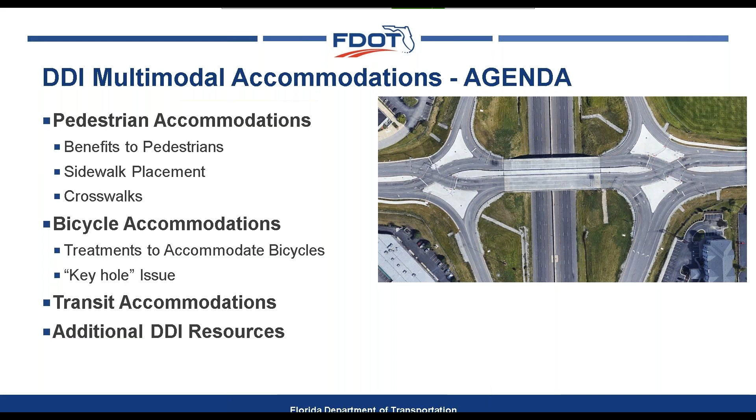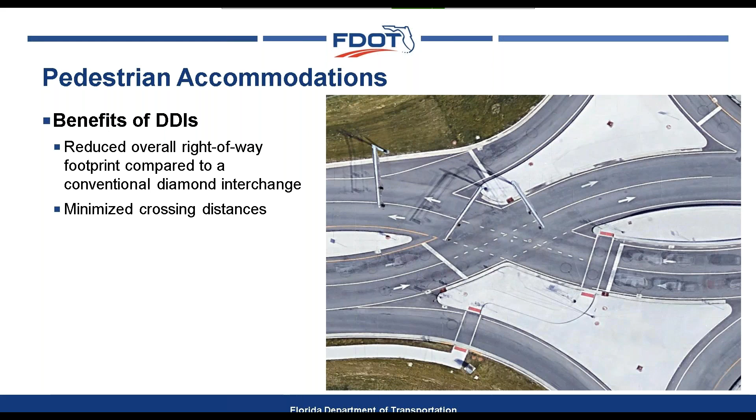DDIs offer several benefits to pedestrians. First, because of efficient traffic operations, we generally see a reduced footprint for a DDI compared to a traditional diamond interchange. For pedestrians, this means they're crossing fewer lanes to execute their maneuver. The intersections operate using two-phase signals, reducing pedestrian wait time and providing more green time. Similar to roundabouts, pedestrians are only tasked with crossing a single direction at a time, with pedestrian refuges built into the design, either in the infields or median, allowing for a simpler crossing. DDIs also provide opportunities for separate paths for bicycles through the interchange, providing separation from pedestrians and safer passage.

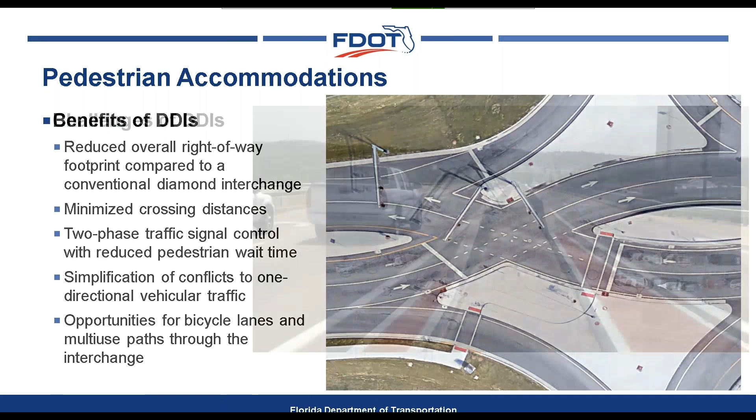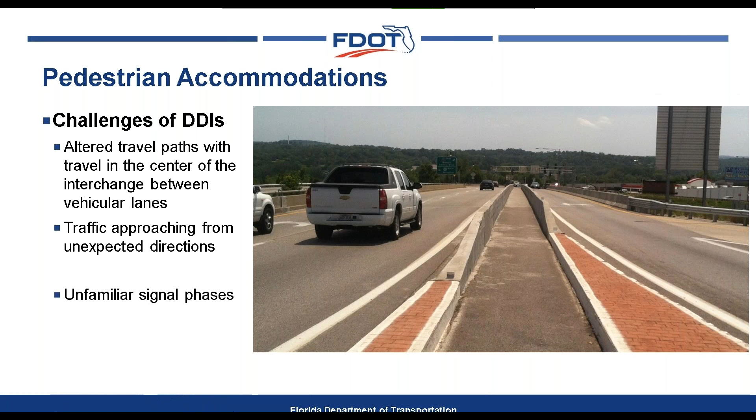DDIs do offer some challenges that may need to be addressed. First, one option allows pedestrians to be placed in the middle of the interchange, as shown in this figure. Placing pedestrians down the center is against user expectation and needs to be intuitive and give adequate protection for pedestrians. There are situations where pedestrians would have to look to the right for approaching traffic when starting their crossing maneuver, which is different than a traditional diamond interchange. The grouping of allowable vehicle movements in the DDI, such as the eastbound through on the arterial at the same time as a southbound to westbound right turn from the ramp, may not be intuitive to pedestrians.

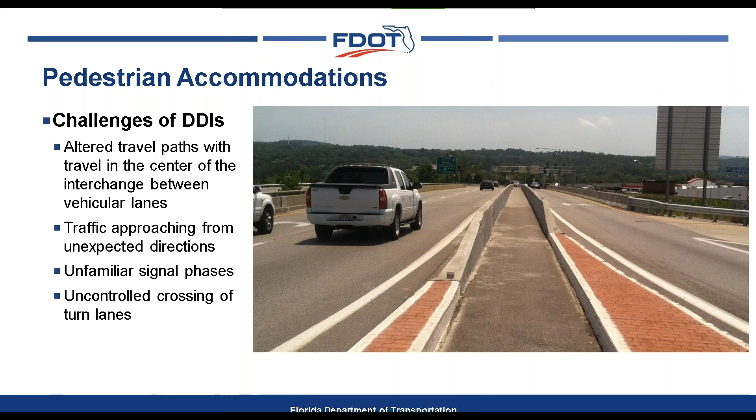Finally, DDIs can introduce situations where pedestrians must cross free-flow ramp movements. These challenges are certainly not insurmountable, but do require some additional care during design to avoid introducing safety concerns for all users.

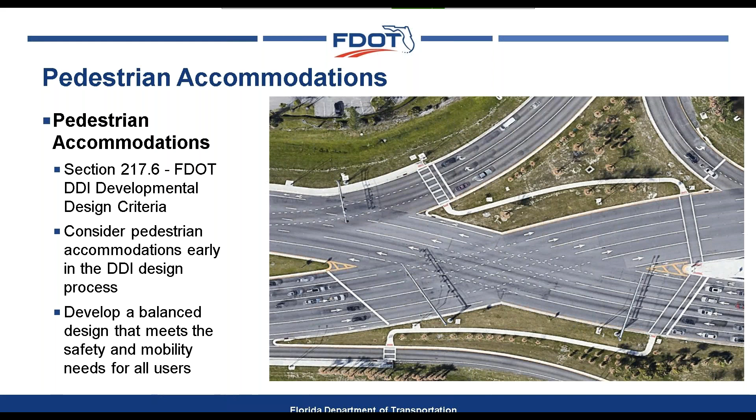FDOT provides guidance on pedestrian and bicycle accommodations in a DDI in their DDI Developmental Design Criteria. Pedestrian guidance is found in section 217.6. One thing to remember is to consider pedestrians early in the DDI design process, as the placement can affect the ultimate layout of the DDI. This will allow you to develop a balanced design that meets the safety and mobility needs for all users.

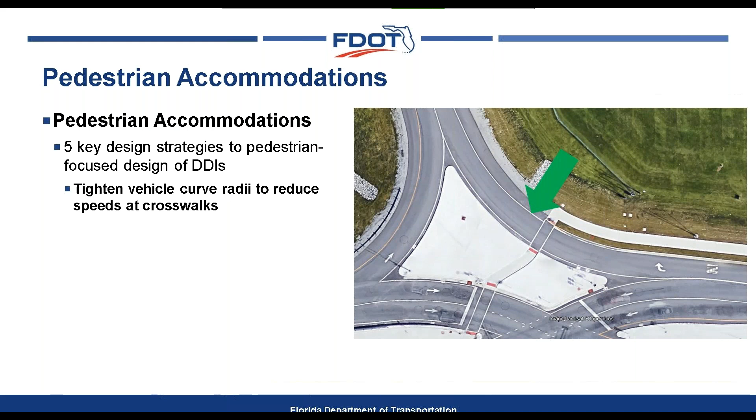When designing a DDI that includes pedestrian accommodations, there are 5 key design strategies to think about. The first is to look to reduce the vehicular speeds in the vicinity of the crosswalks. One way to do this is to reduce the radius of the turning movements. Research has shown that pedestrians have a higher chance of survival if hit by a car when vehicular speeds are reduced.

Second is to ensure that adequate sight distance is available for both pedestrians and vehicles at the crosswalks. The need is to make sure that both can see each other before the pedestrian steps into the roadway to initiate the crossing maneuver, and I think that's the critical piece. A lot of times we focus on whether the vehicle can see the pedestrian, but we also need to make sure that the pedestrian can see the vehicles approaching.

Third, try to provide storage length sufficient to store the vehicles at the yield location to avoid backing up into the crosswalk, as you see here. We don't want pedestrians to try to cross a ramp around stopped vehicles.

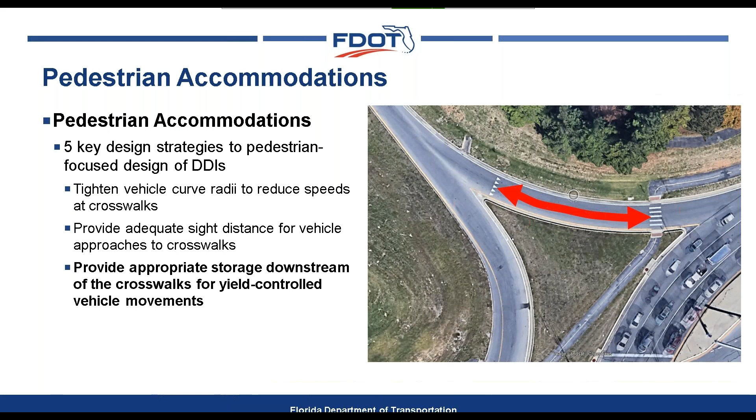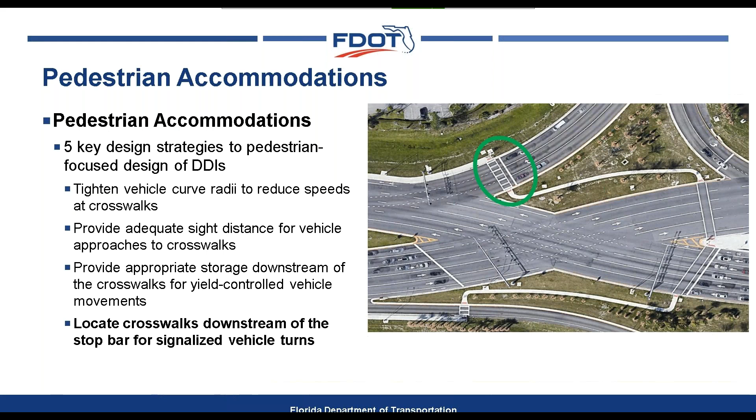Fourth, provide adequate spacing from the stop bar for the crosswalk. It's also important to locate the stop bar where drivers are actually expected to stop. This becomes hard at times as drivers try to creep up to look for gaps in approaching traffic.

Fifth, it's important to provide the appropriate traffic control at the ramp terminal. Different situations exist where the right turn, for example, could be a free flow movement, stop controlled, signalized, allowing right turn on red, etc. Understanding how these conditions impact pedestrian safety at your specific location is critical to the design.

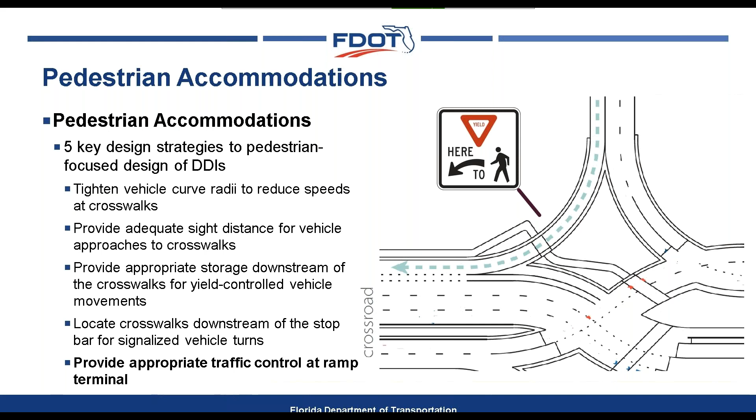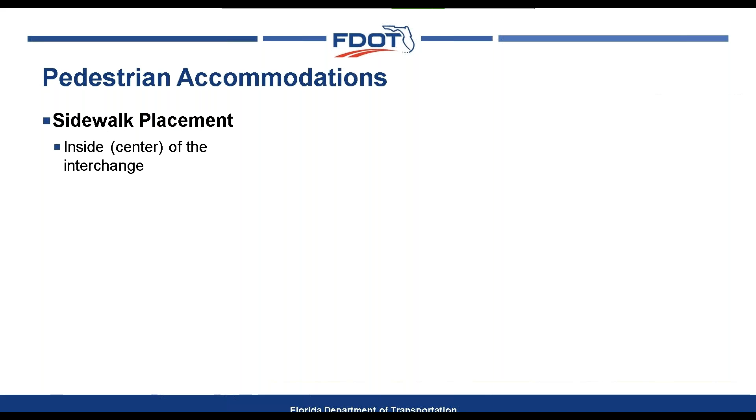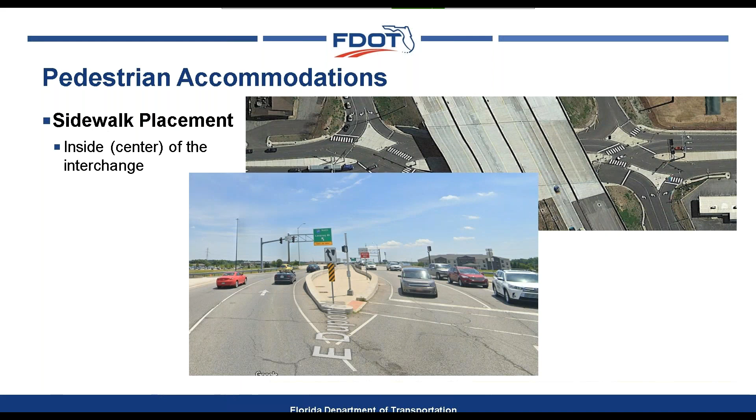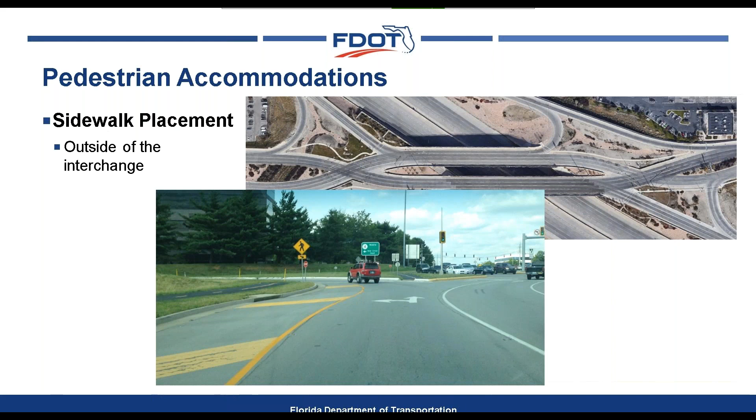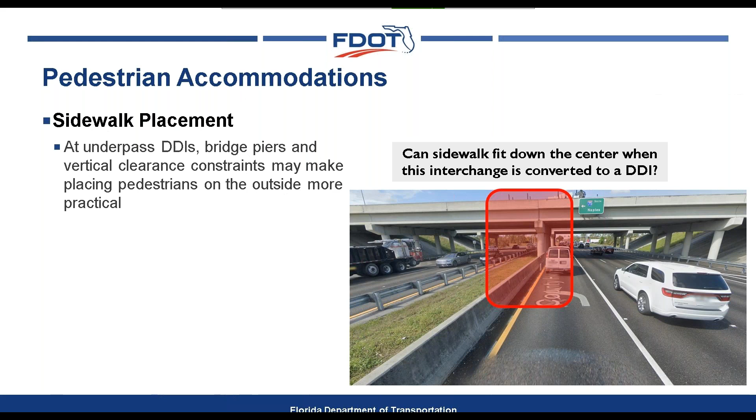If the number of lanes were able to be reduced in one or both directions, possibly, and that's something that would need to be confirmed early in the design process. Placing pedestrians down the center of the interchange minimizes conflicts with left turning vehicles by reducing the number of free flow ramps needed to be crossed.

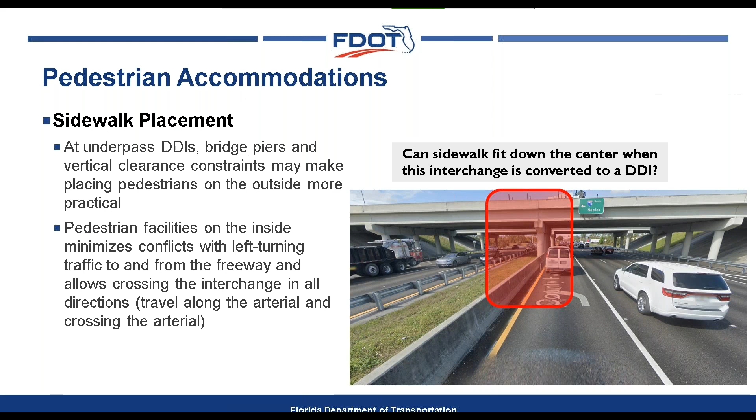As outlined in the FDOT DDI Developmental Design Criteria, section 217.6.1, the center, or down the middle, walkway is the preferred option for a DDI in Florida for several reasons. First, walkways down the center avoid free flow left turning movements.

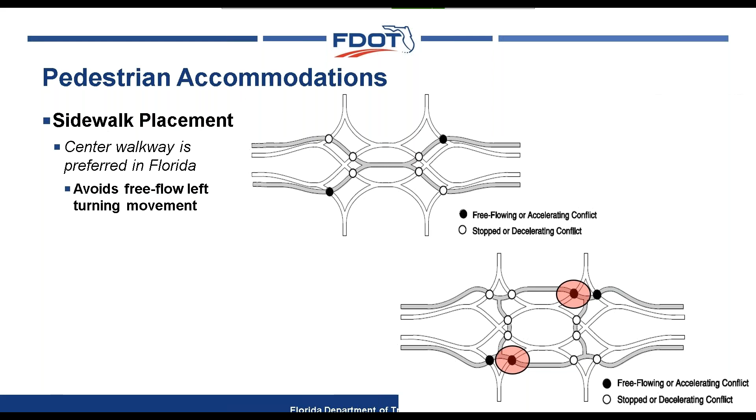Second, center walkways improve the line of sight between the pedestrians and the drivers. As the pedestrian approaches the crosswalk and looks to cross the roadway, there should be no obstructions between the approaching vehicles and the pedestrians. This allows the pedestrians to be fully visible as they cross the street, then continue the remainder of their crossing maneuver to get to the outside of the roadway, outside the interchange.

Finally, the center walkway is preferred in Florida when crossing from the median. Crossing at the signalized intersection is consistent with expectations, i.e. the pedestrians would look to their left first for approaching vehicles. So think about a normal intersection as a pedestrian steps out into the road, their first direction they're looking for oncoming traffic is to their left. And when they're in the median, it's the same thing.

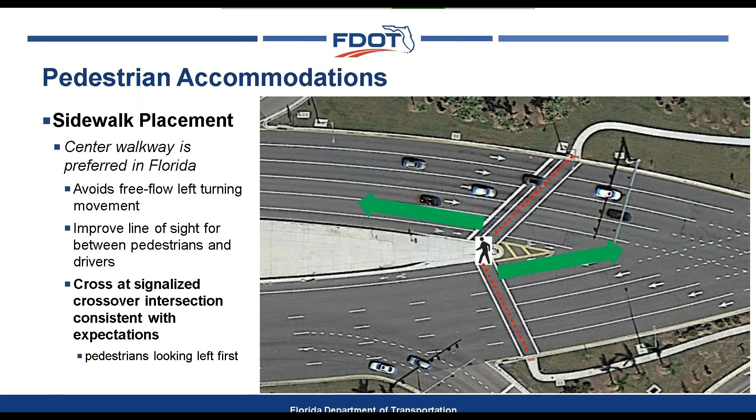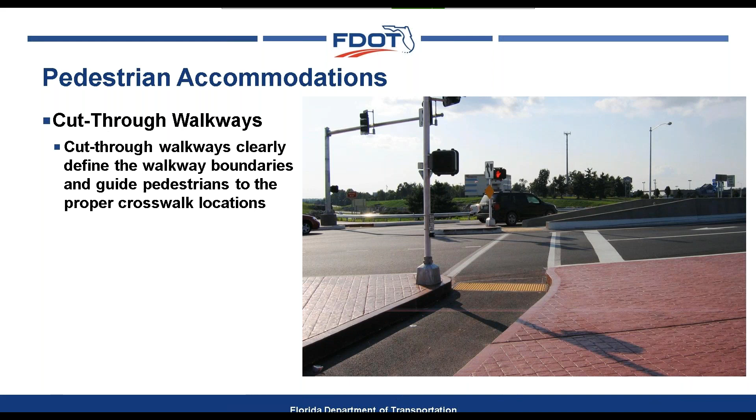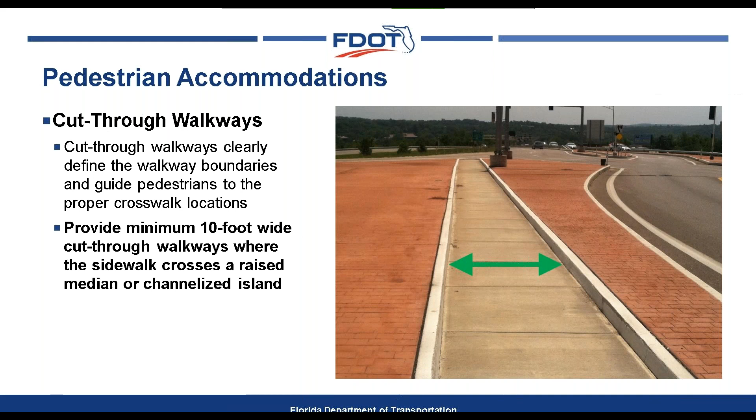The FDOT DDI developmental design criteria defines the cut-through walkways need to be a minimum of 10 feet wide when there is an elevation difference between it and the channelized island. And the walkway should be aligned to provide a perpendicular crossing at the next crosswalk to reduce the crossing distance and the pedestrian exposure.

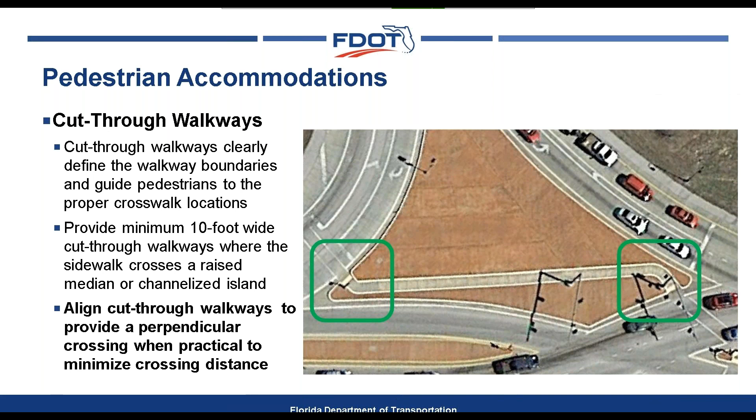When selecting the location of the crosswalks, several things need to be considered. First, drivers should be able to see the entire crossing, including the curb ramps, where pedestrians can be waiting to cross. Also, the pedestrians should be able to see the approaching vehicles. This is especially important at the free-flow crossings.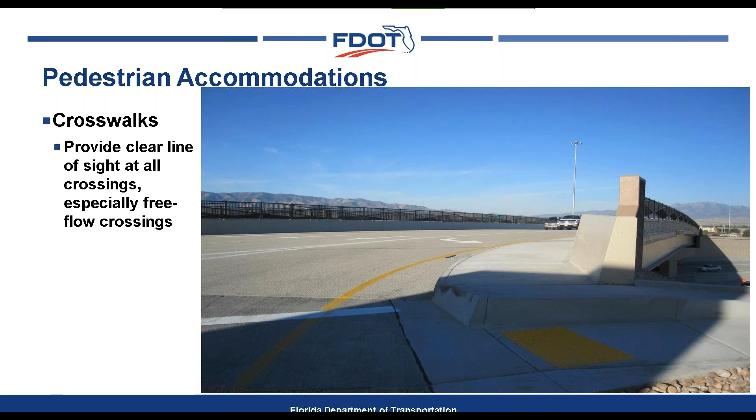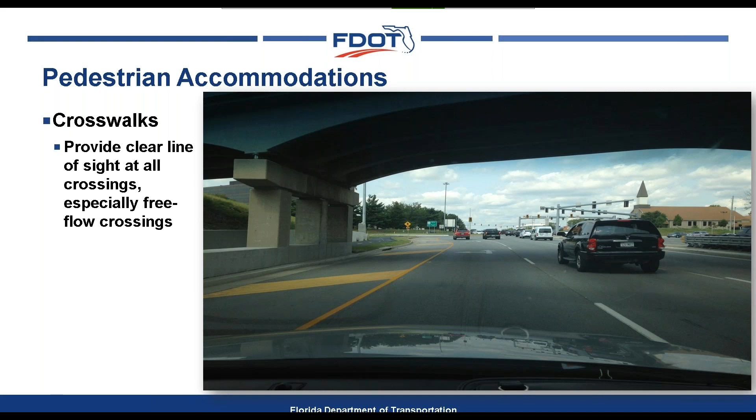For a DDI under the freeway, make sure the bridge isn't in the way. There are two important objects we want the driver to see as they come up to the pedestrian crossing. The first is a crossing with the appropriate signage as indicated by the left-hand line. Second is the pedestrian who would be located where this second line is pointed, or the right-hand line. Be aware of possible sight obstructions from any structure elements such as the bridge pier in this image.

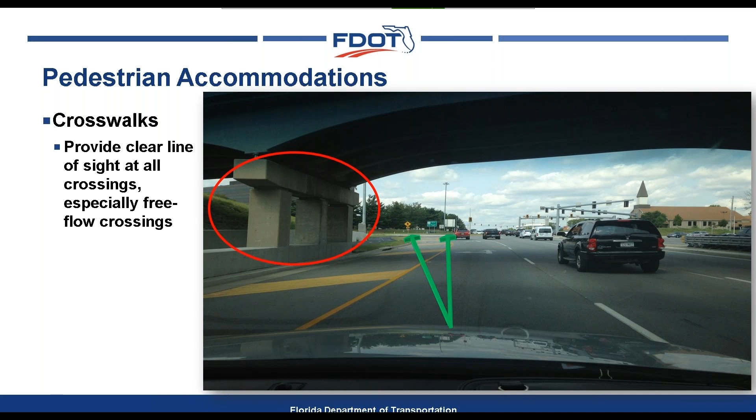As we've already discussed, avoid placing items that could block the sight line between the pedestrians and the drivers, such as a raised vertical barrier that helps define the eyebrow. For this DDI, the barrier is outside the sight line. If it would have been in it, one option would be to taper the barrier down or use a reduced height vertical face, such as a standard curb that can easily be seen over.

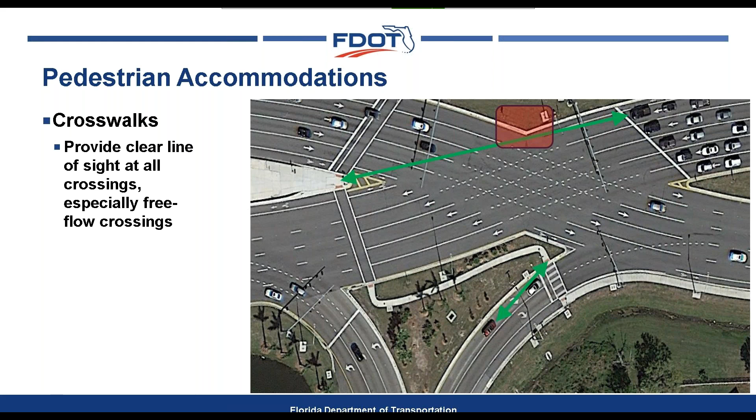Wherever possible, try to make the crosswalks as near perpendicular crossings as possible to reduce the crossing distance and the exposure of the pedestrian. Use judgment and understand the balance of the stop bar location, the clearance interval needed for the signal, and the crossing length. Also recognize the driver's tendencies.

In the case of this crossing, making this a perpendicular crosswalk would have pushed the stop bar pretty far away from the arterial for the right-hand turn lane. Would drivers really stop that far back, or would they creep up to see the approaching traffic and possibly be sitting in the middle of the crosswalk?

Position the crosswalks in locations where the expected speeds are reduced. When crossing the outside ramps, placing them close to the arterial as the vehicles are entering the curve is good for speed management, as well as positions them in the area where the drivers are really looking.

Pushing these crosswalks farther down the ramps gives drivers the ability to exit the curve and accelerate, as well as puts the crosswalk in a location where they're potentially looking over their shoulder at gaps in merging traffic rather than focusing on the crosswalk itself. This strategy keeps the pedestrians in a more controlled situation.

As we discussed earlier, place these crosswalks far enough away from the yield line to avoid vehicles stacking back into the crosswalks.

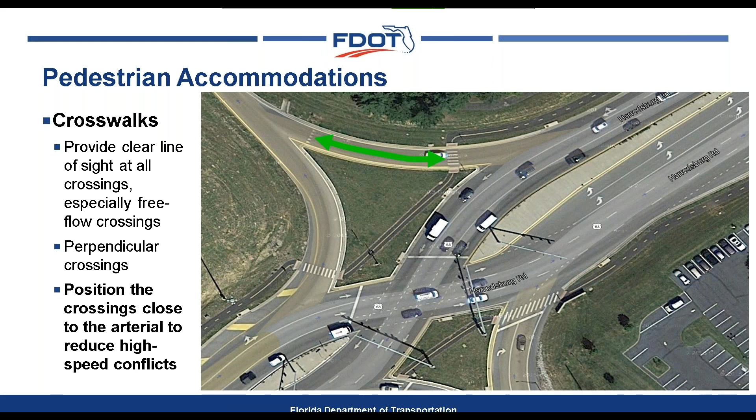The ramp terminal design is very important to the safety of pedestrians. There are six basic types of traffic control options for turning vehicles from the exit ramp onto the crossroad that a pedestrian will likely have to cross against.

First is the free flow movement into an acceleration lane or auxiliary lane, where speeds could be an issue. In general, keep the radius tight to control speeds, targeting no more than 20 or 25 miles per hour for this movement. Ensure nothing obstructs the sight lines, such as vegetation or signs, so pedestrians don't accept insufficient gaps when crossing. It all comes back to making sure you have adequate sight lines for both pedestrians and vehicles.

The second type is a yield control with an acceleration lane or auxiliary lane on the arterial. Position a yield line ahead of the crosswalk to avoid vehicles queuing back onto the crosswalk if possible. Because this is a yield condition, drivers may be looking over their left shoulder at approaching traffic rather than for the pedestrian looking to cross the ramp. Look for opportunities to increase driver awareness of a pedestrian waiting to cross.

Third is a yield control with no downstream acceleration lane or auxiliary lane. Similar to the previous scenario, position the yield line ahead of the crosswalk to avoid vehicles queuing back onto it. Again, this situation presents the concern that drivers are looking over their left shoulder for gaps in traffic rather than for pedestrians at the crosswalk. Again, look for opportunities to increase drivers' awareness of a pedestrian waiting to cross.

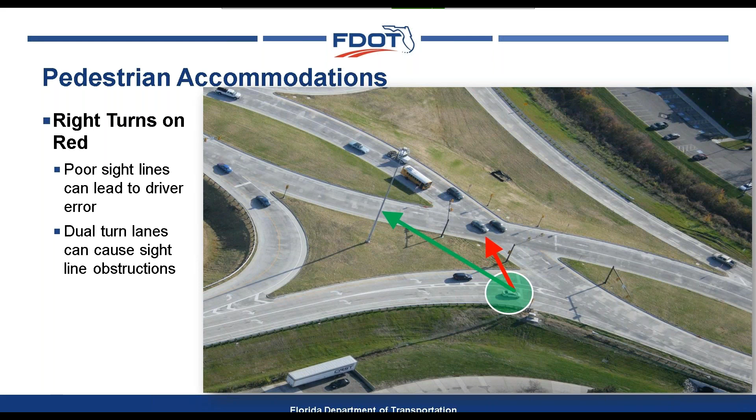If the animation didn't quite work, basically what we're saying is if they're following the green arrow, that's the typical direction they're looking at a normal intersection. But when you look at the red arrow, that's where they should be looking. If they're looking at the green, this car may think he's got a gap and pull out right in front of the silver car that's coming across. That is one of the concerns we have with allowing right turns on red.

The final type of traffic control is really my preferred strategy when designing, and I believe it's FDOT's as well: take advantage of the two-phase efficiency of the signal and don't allow turns on red. So signalize it, but don't allow turn on red. Because this is a simple two-phase signal, there's still a lot of green time able to be allocated to the right or left turn movement, so it shouldn't create excessive delays if you don't allow the turn on red. This creates a protected crossing for pedestrians and takes away a lot of the concern we just discussed. David, do you want to weigh in at all on that?

Yeah, I'm all for signalizing the right turns and making it a no turn on red. I think it's a very good idea. And I would extend that also to the left turns. Drivers don't typically even think that they could go on a left turn - they usually see a signal and stop anyway. But putting the sign that says no turn on red is important.

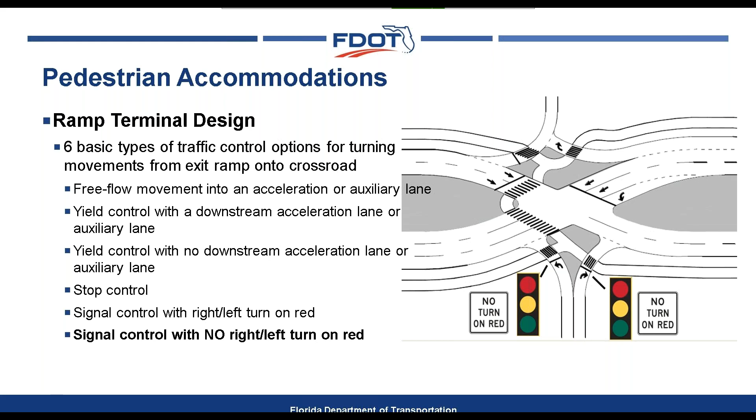The intersection angle is also a good way to control speeds at the intersection with the arterial. Intersecting angles of 30 degrees may imply motorists can maintain a greater speed, with an auxiliary lane ahead on the crossroad. Intersecting angles of 60 to 90 degrees imply motorists should slow and possibly stop before turning onto the crossroad. Anything that can be done to reduce vehicle speeds where pedestrians could be in conflict is essential to a pedestrian-focused DDI design.

Brian, you have time for another question. Absolutely.

This one's about PED push buttons. Are there PED buttons in place for all of these PED crossings shown? Are these placed in the islands? Yeah, it's a great question, because we have a couple slides coming up, not too far from here, where we talk about the pedestrian push buttons, since that becomes a critical piece of the design.

In the cases we were showing here, with these right turns, they're likely placed in the islands or something similar. But there is a specific distance, especially when crossing pedestrians into the median, and a specific offset between the two push buttons that you want to maintain to avoid confusion and to make it ADA compliant. So it's a great question.

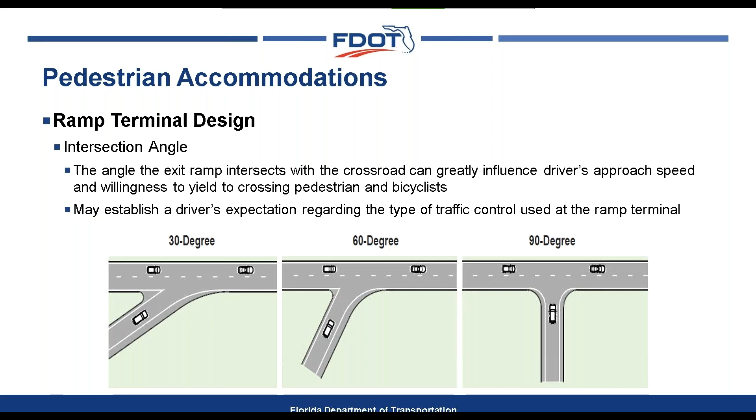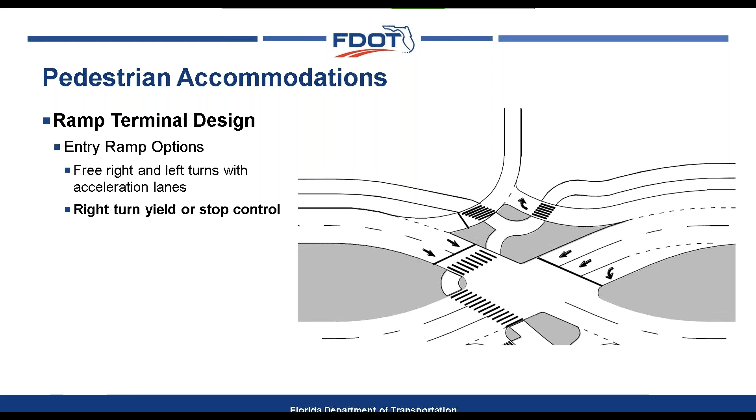Now, a little bit to the questions that were asked earlier. We talk about pedestrian signals, and this is going to be focused more on the median section because you're going to have multiple crossings stacked up in the median. When placing walkways down the center, the DDI information guide, second edition, that FHWA has put out, offers two strategies for where to place the pedestrian signals and call buttons: either place the signals on the wider side of the median, or separate them diagonally so the push buttons are consistently on the same side, the pedestrian's right side as they approach the crosswalk. You'll notice the stagger, but as you're approaching the crosswalk, the push button is on the right side, and that consistency is what you would expect.

David, looks like we have another question. Sorry about that, let's see.

What about using thermal imaging instead of push buttons? Yeah, that's a good strategy. We haven't done a whole lot with that yet, but I know that technology is out there. David, I don't know if you've seen that in Florida. Yeah, I'm really not familiar with that. Okay, but it would stand to reason that would also be a good strategy, though I think it's somewhat in the infancy stage. Paul, I'd love to hear more about your experience with that, because I could see a lot of benefits to it.

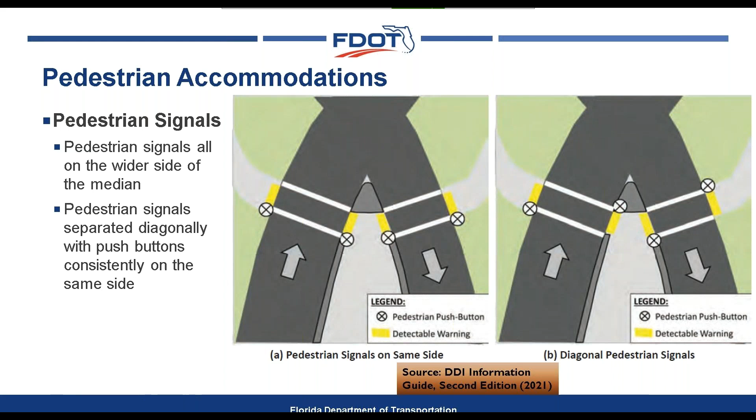With the pedestrian crossings in the median, we need to make sure that the crossings are ADA compliant and that the minimum 10-foot separation is provided between the pedestrian push buttons. This is difficult to do when the median is very narrow, so in those situations, consider moving the stop bar back to where the median is wider. But we need to be careful, as pushing the stop bars back will increase the clearance interval in the signal and reduce efficiency. It's back to that balancing act, and why we really need to look at this early in the design process to determine the best location for not just the crosswalks, but also the signal timing, the horizontal curvature, and the tangent length through the crossover.

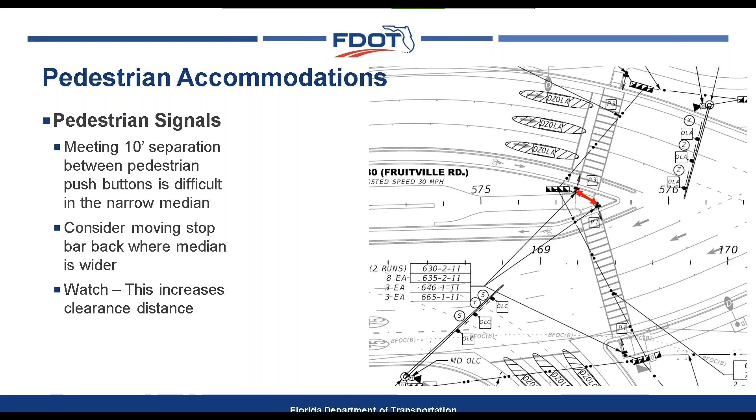This image is an example of an undesirable installation of pedestrian push buttons, because this situation can be confusing for pedestrians since there are multiple buttons in the same spot, essentially, with insufficient storage at the ramps because of the narrow median. With more than two pedestrians standing here, they're literally going to be stepping almost on top of each other or out into the roadway. This would be a perfect situation for pulling these curb ramps back into the fatter part of the median.

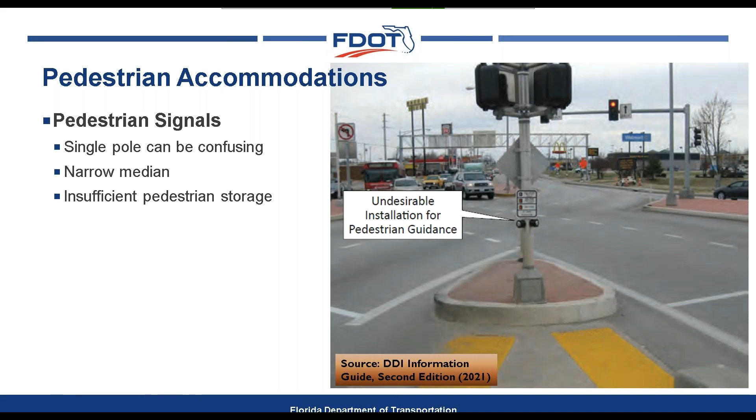All right, David, I don't know if we have any other questions. It doesn't look like we do. I wanted to pause for just a second. There's a lot there with pedestrians, and there's probably still even more that we could have gone into, but I do know that FHWA's guide has a lot of information on this as well.

Okay, we have another question here. Will there be guidance on assessing capacity of ped storage at a median, since the split phasing will have pedestrians waiting for green, say to the right, while pedestrians from the left are looking to get from the crosswalk to the sidewalk?

Let's see. I think what the question is, if I'm getting this right, is that you've got a very limited space, depending on where this crossing is relative to the nose of the median. Essentially, pedestrians are moving in one direction while others are not, and then vice versa, because it's a two-phase signal. We need to make sure there is enough room in there. I believe there's guidance in the FHWA document, which I'll refer to at the end, on generally how wide the spacing should be. Based on that width, you would want to make sure you can pull it back away from the nose of the median to give yourself enough separation.

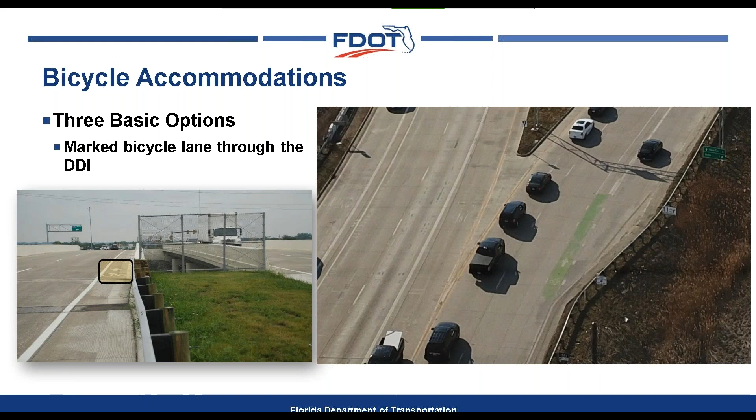Yeah, that's correct. Oh sorry, go ahead David. Go ahead. Well, I was going to say I'm going to get to that a little bit, probably my next slide. But David, I think after I give this slide, it might be good for you to jump in, just because I feel like you've got some good insight too from Florida's perspective, correct?

Yes. So when we talk about these marked bicycle lanes through DDI, general guidance is it's sometimes worthwhile to specify wider bicycle lanes to accommodate that horizontal curvature and still provide that lateral clearance to the center barrier. Also, enhanced markings such as green paint, dashed skip lines, and additional bicycle lane pavement markings may be necessary to reduce confusion through the crossover intersection.

David, yeah, go ahead. Yeah, we typically have a buffered bicycle lane that goes through there, so there would be two lines separating the bike from the travelway. And in some cases, there are districts actually toying with putting a raised separator through there to give some physical separation between the bike and the travelway. But that isn't a standard for Florida - it's something that some of the districts are looking at right now.

Yep, so that sounds like it's still evolving a little bit.

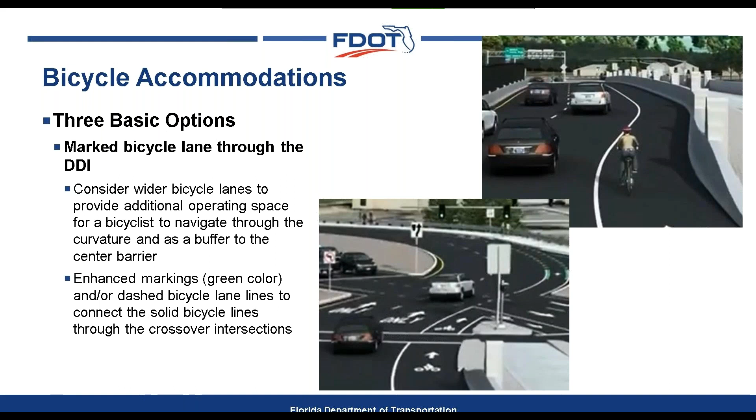Yep, and so this here is just an example of the enhanced markings for bicycle lanes. My recommendation would certainly be to work with the district and central office staff when looking at these, because some come with maintenance concerns. For example, the green paint looks great day one, but after a couple years it wears off. Do the maintenance staff really want to go back out there and paint green paint on the road? So those are things to be mindful of with respect to maintenance.

The second option for getting bicycles through a DDI is using a separate bicycle or multi-use path. For that, let's refer to the FDM 223.2.4, separated bicycle lanes, for more guidance, including appropriate widths.

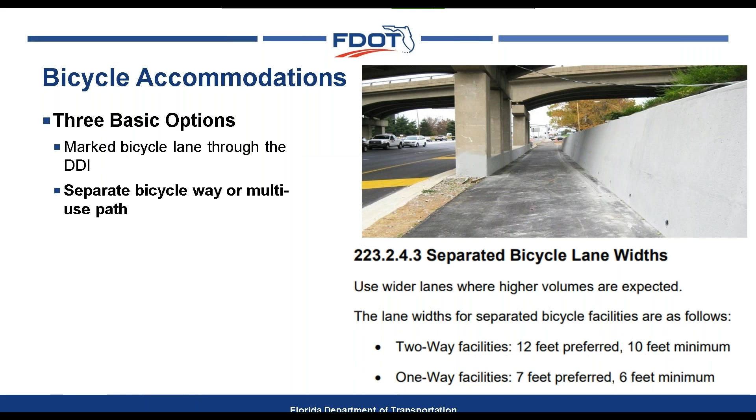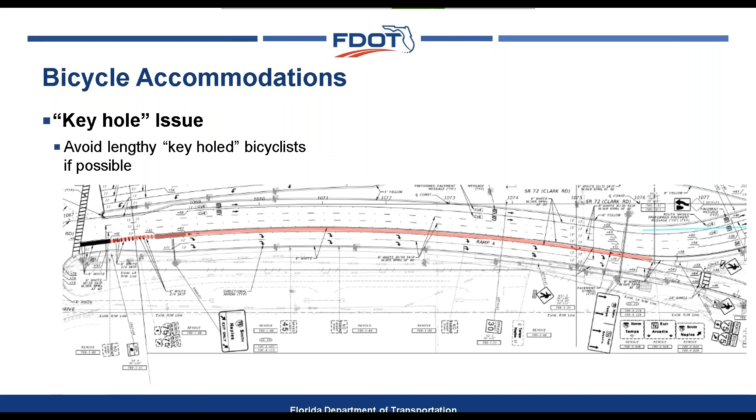But the beauty of using separate bicycle facilities is that it can avoid what we call the keyhole issue, where bicycles can be trapped between the turn lanes and the through lanes for extended lengths, such as this image here. In this example, the bicyclist is in his own bicycle lane between the through lane and the dual right turn lane for nearly a quarter of a mile. This isn't always comfortable for riders and is something that should be avoided if possible.

What gets worse is if one of these right turn lanes is actually an option lane, where a driver can either turn right or go straight. So if instead of a dual drop right turn, what if it was a right turn lane and a through right? This puts the bicyclist in a very bad situation, as they'd be trapped between two through lanes past the right turn diverge. Yeah.

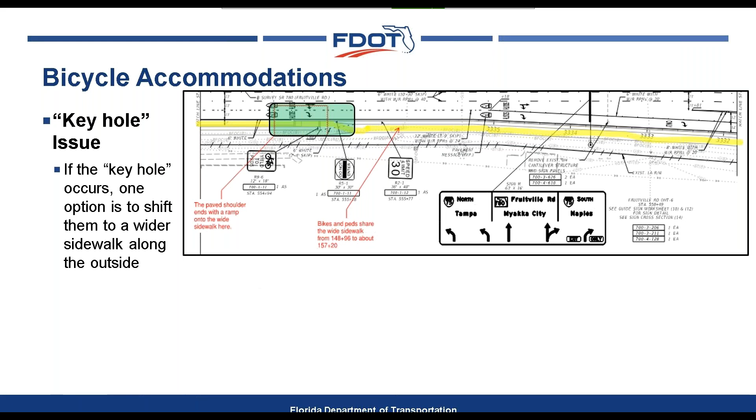So if you get a situation like that, what we call a keyhole, one option is to shift them to the wider sidewalk along the outside, as you can kind of see here, and then cross the free flow ramp with the pedestrians. So you see that here as they're crossing that little green highlight, and then re-enter the bike lane prior to the crossover. This is a good strategy to avoid that conflict area where there's a keyhole or especially an option lane, because that option lane becomes a real nightmare trying to figure out how to put bicycles through it if you keep them on the road.

Yeah, if we do that, you need to make sure that your sidewalk is wide enough to accommodate both pedestrians and bicycles - it would be the criteria for a multi-use path. Yep, great point. And again, that's why we always talk about thinking early in the design about where you're putting bicycles, where you're putting pedestrians, because it could impact your overall width and your right of way.

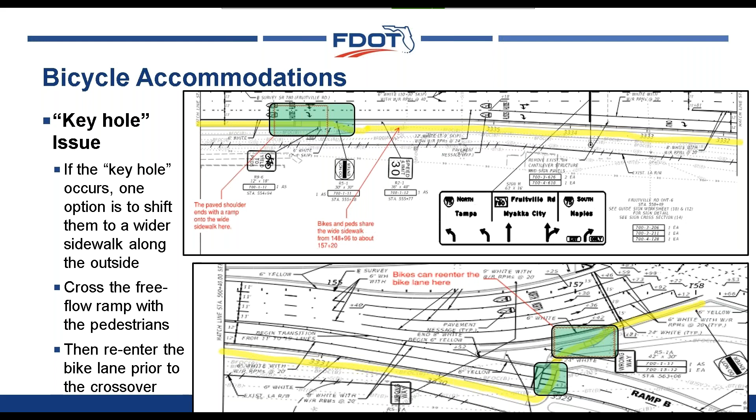The third option is to allow bicyclists to share the road with vehicles through the DDI. But I need to stress this should only be used in very low speed conditions. This is not a favorable condition at all.

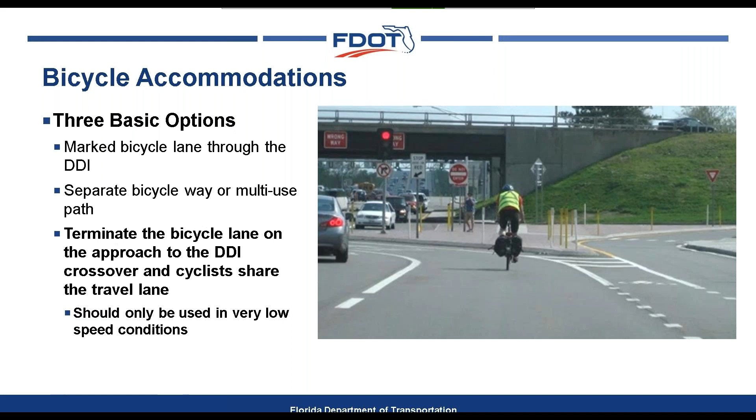I want to briefly touch on transit. There's not a lot of examples of DDIs with transit accommodations within them, so the guidance is pretty sparse on this subject.

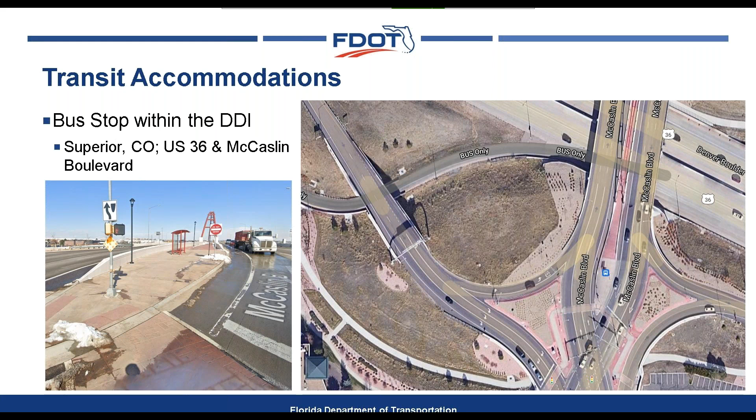There's a DDI in Minnesota that actually has light rail running through the center of the DDI. The geometric design considerations for a DDI with center-running light rail include the crossover requiring longer tangent lengths to clear the rail line on a straight trajectory.

Remember the need to extend the tangents through the crossover so drivers don't need to change the position of their steering wheel until through the intersection. Remember, we do this to avoid path overlap.

These tangents would need to be extended because the width of the intersection is greater with the presence of the light rail line. Also, the spacing of the crossover intersections needs to be long enough to store the entire length of the train, unless the signal phasing allows the light rail to cross the entire DDI without stopping.

So if there's a preemption in the signal, that can override it and for that short period, flash all red for everybody else and allow the train to go through. Again, this is an extremely unusual circumstance, but one I thought I would at least bring up.

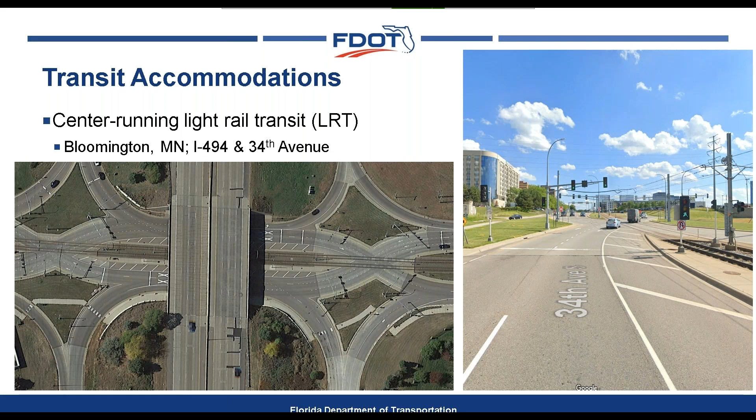Just briefly, there's several additional DDI resources available, as I referred to a couple of these. First is FDOT's own developmental design criteria for DDIs, D217. That is available to you when you're designing your DDIs. The NCHRP 959, which is the DDI Informational Guide 2nd edition.

This is FHWA's document. The document on the very right is the 1st edition, also very good, but as you can tell by the date of August 2014, it's outdated. So there's some good information there, but I would recommend NCHRP 959 instead. There's a lot more material, especially on traffic operations and pedestrian facilities.